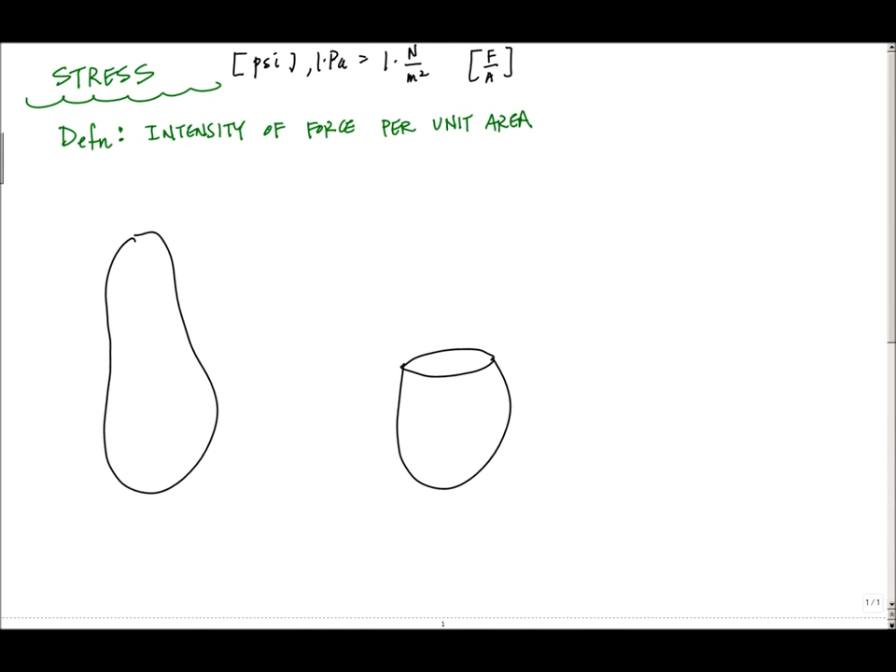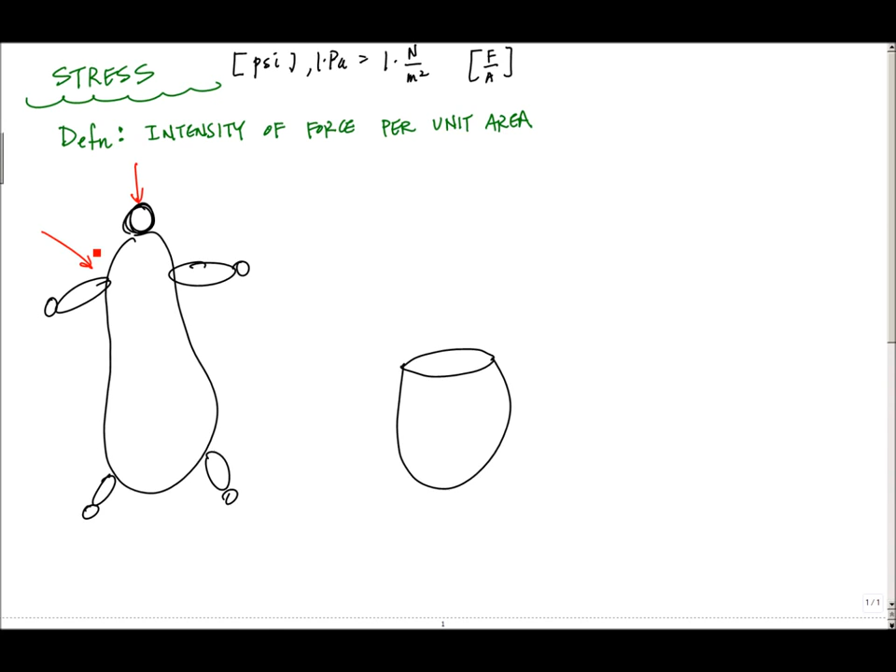So the concept is kind of cool. You've got a body here, and let's make it a human body, so you can relate this to something more tangible. I've added legs and arms to my potato here, so it's an awkward potato, but nonetheless, there are a lot of external forces acting on this person, pulling on someone, extending someone, whatever.

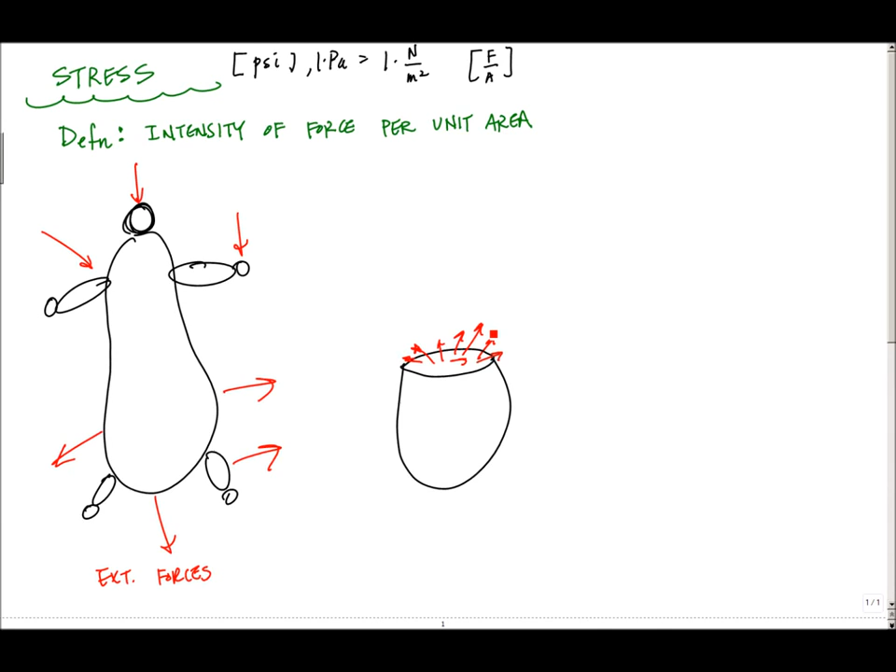These are all my external forces. And if I make a cut and look on the inside to see what's going on, what's holding this body together? I've got muscles, I've got bones that have forces acting in all kinds of directions. And each of these little internal forces represents something inside my body that is carrying a load.

So if I zoom in on this little increment of area right here, this is dA, I've got this incremental force acting on this area, which I'll call dF. And if I assign a coordinate system to this element, let's call this X over here, Y, and Z right here.

I can break up this force vector into components. Here, this would be dFx, there'd be a vertical or z component dFz, and then dFy right here. Each of these increments of force acts on this area, and it induces a stress, this intensity of force per unit area.

And really, there are only two types of stress. Every force results in one of these two types of stress. The first type is a normal stress, not because it's normal psychologically, but normal as in it's perpendicular to this area dA. It's normal to the surface.

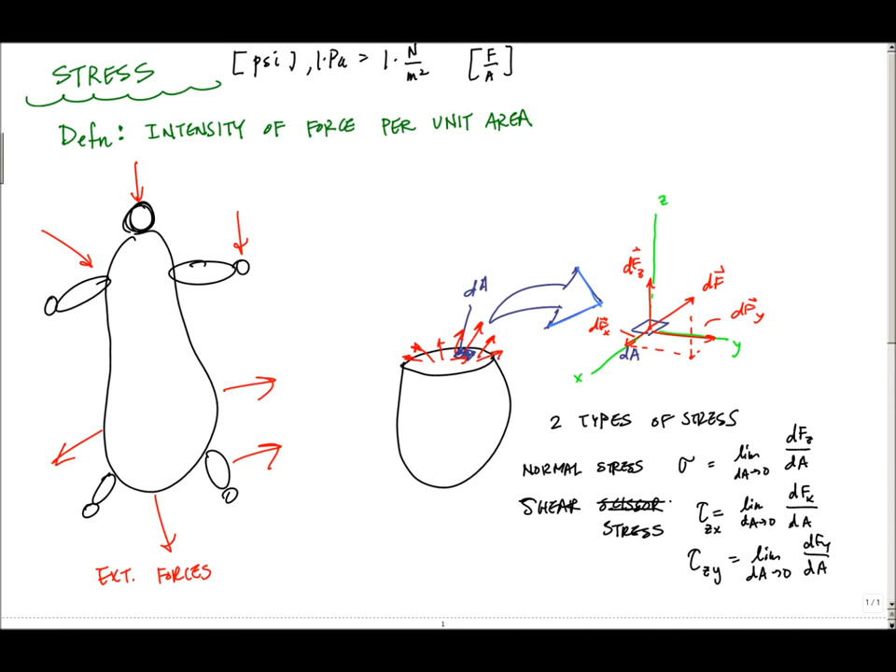Now, this you're going to come back to later on as you get more and more into mechanics of materials. But this is just to give you a sense of: I have all these forces here. I've got these internal forces going on. If I zoom in on a single area, I look at this little incremental force, the internal force, the guts, if you will, my cartilage or my muscles that hold my body together, something, right?

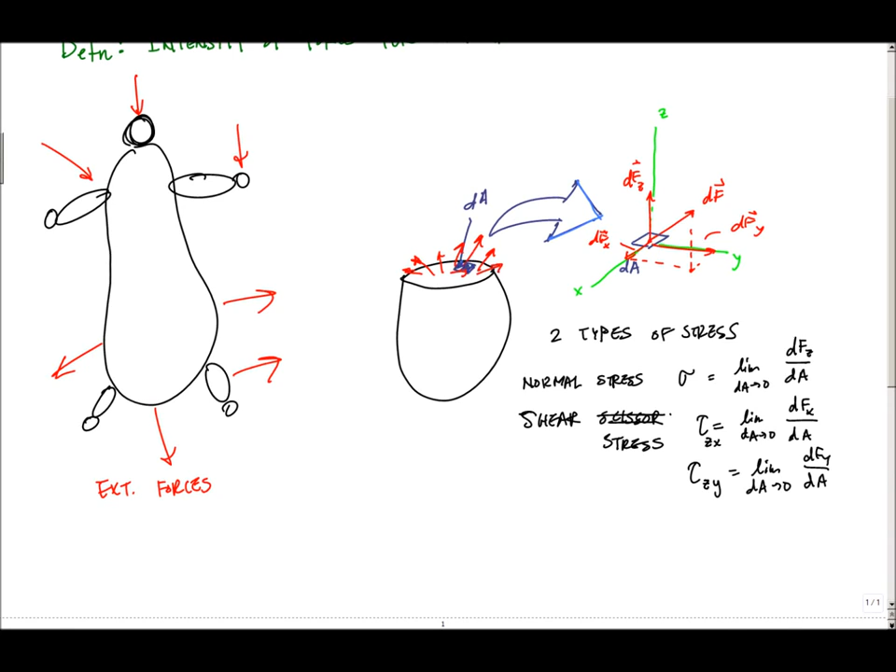But it has some internal force, and I can break it up into components, and it's inducing a normal stress or a shear stress. Okay, that's what you have to know. We have two types of stresses, shear and normal stresses, but the key here, especially in the early going of mechanics of materials, is to be able to take what you know as internal loading and calculate the stress associated with each internal load.

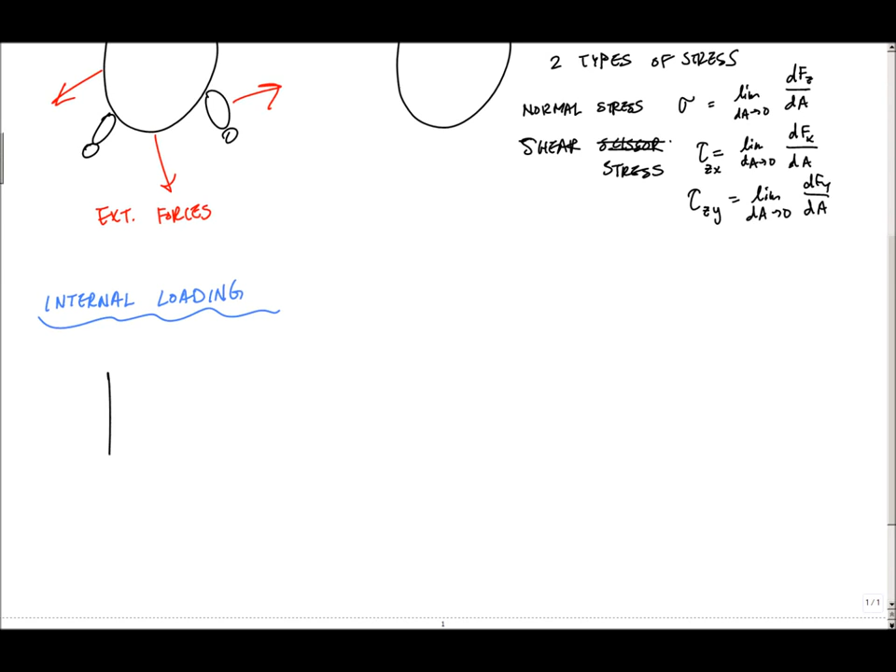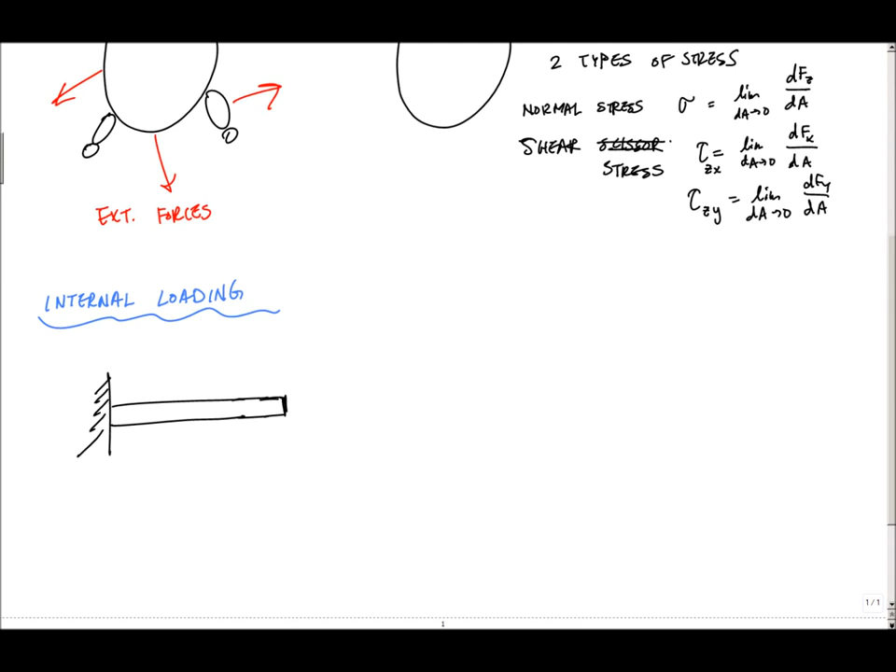And so internal loading, you might have seen in statics: you had maybe a cantilever beam here, a cantilever structure. The cross section could be circular, rectangular, an I-beam, whatever, right? And maybe you have all kinds of loading going on. You have a distributed load, W, an axial force, we'll call that P, maybe even some sort of twisting action going on. We'll call this a moment about X.

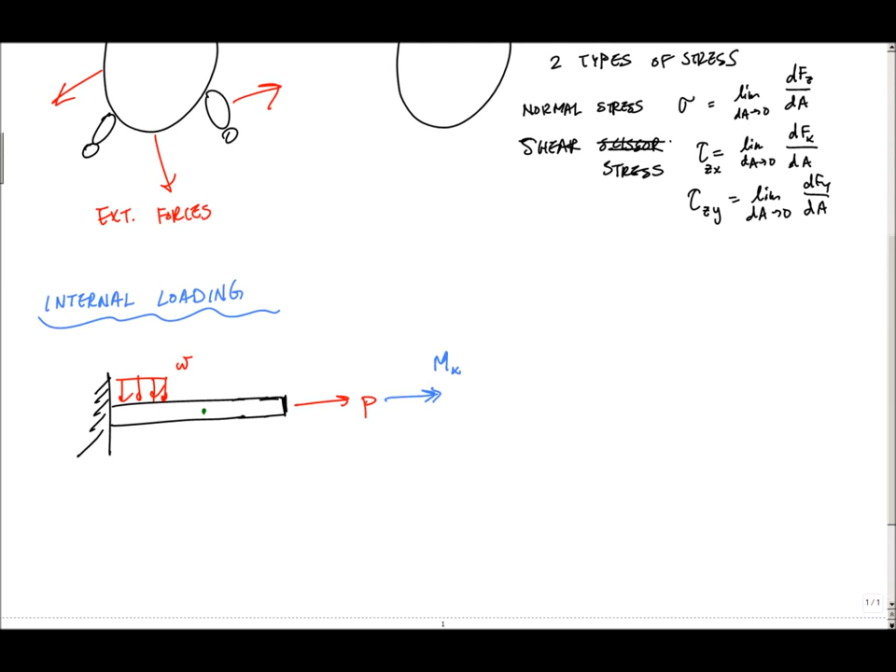And one basic problem was to calculate the internal load at A. So call that point A. What's the state of internal loading at A? What you want to do is make a cut right here. We make a cut, draw the free body diagram of that cut, and we have internal loading which, drawn in its positive sense, is a shear, an internal axial force, maybe a moment, and maybe an internal torque, call that T.

And in mechanics, each of these, V, M, N, and T, the shear, moment, axial force, and torque, induce either a normal stress or a shear stress. To put it in a nutshell, with some equations you'll get to later, this normal force, as you can imagine, induces a normal stress. If this cross section has some area A and a moment of inertia I, which we'll need later, the normal stress is sigma equals N divided by A.

And this moment, which is bending, causes a couple: compression on one side, tension on the other. It also induces a normal stress, which uses the bending formula, minus My over I. Again, this is for later. This is kind of mechanics in a nutshell, at least some of the core equations. These are my normal stresses. For most of an introductory course, the only things that induce normal stresses are the normal force and a moment.

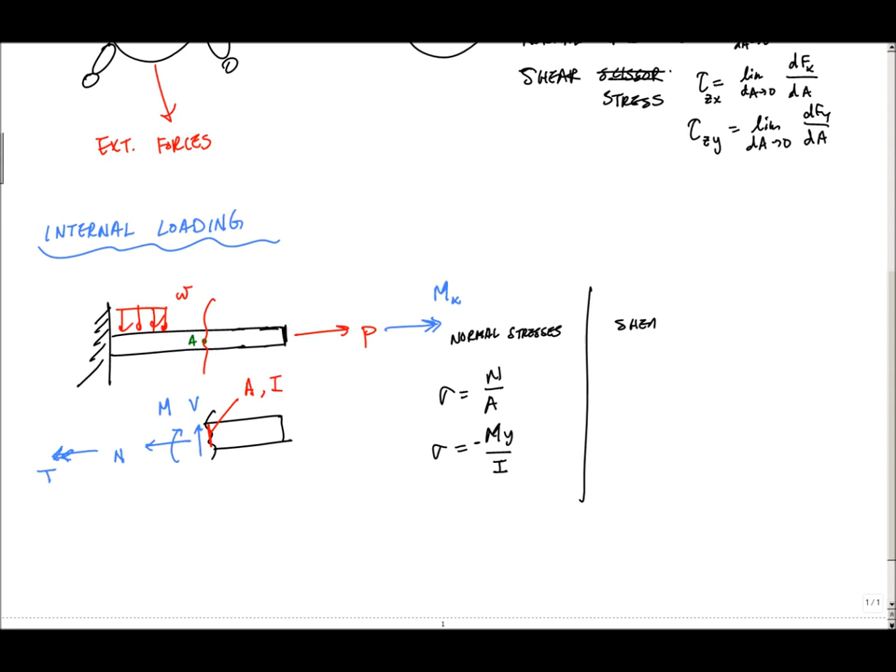The shear force, as you could imagine, induces a shear stress. In beam bending, it's VQ over It. We'll talk about what that equation means later, but this is the shear stress formula for transverse shear. And then the twisting action, just like when you're twisting chalk and you say it's sheared off: here tau equals T rho over J, J being the polar moment of inertia, and T the internal torque.

So this torque and this internal shear force induce shear stresses at point A, and this moment and axial force N induce normal stresses at this cut at A. And that's essentially mechanics of materials. These are the four crucial stress equations you'll need to use, and they associate the internal loading to the appropriate stress. So hopefully that gave you a little bit of mechanics of materials in a nutshell.